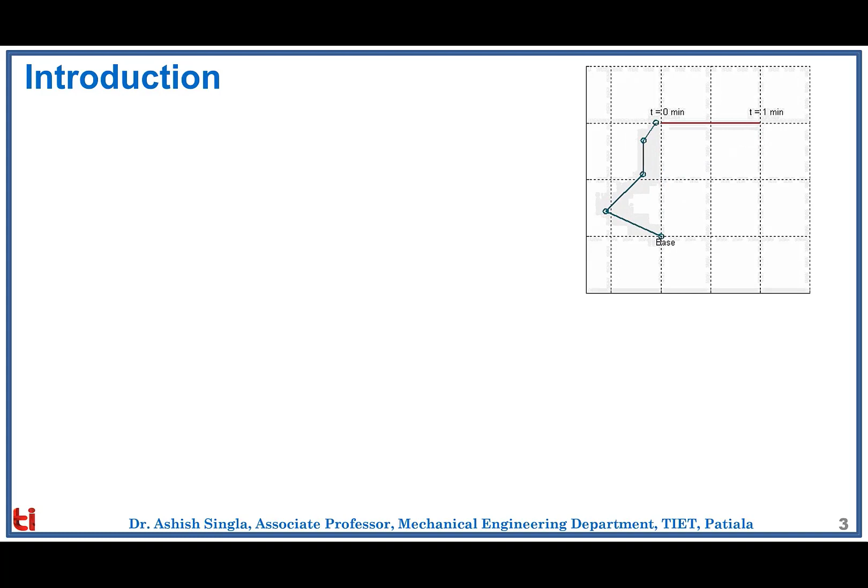We know that in any industry where the robot is deployed, it deals with a number of tools and parts. In the previous sessions we discussed that position and orientation of a body are very important, and a typical rotation matrix used to define the orientation of the body is given by a 3x3 matrix.

So if we see from the operator's perspective, it's very difficult for the operator to enter these 9 values. Do we have any other alternative?

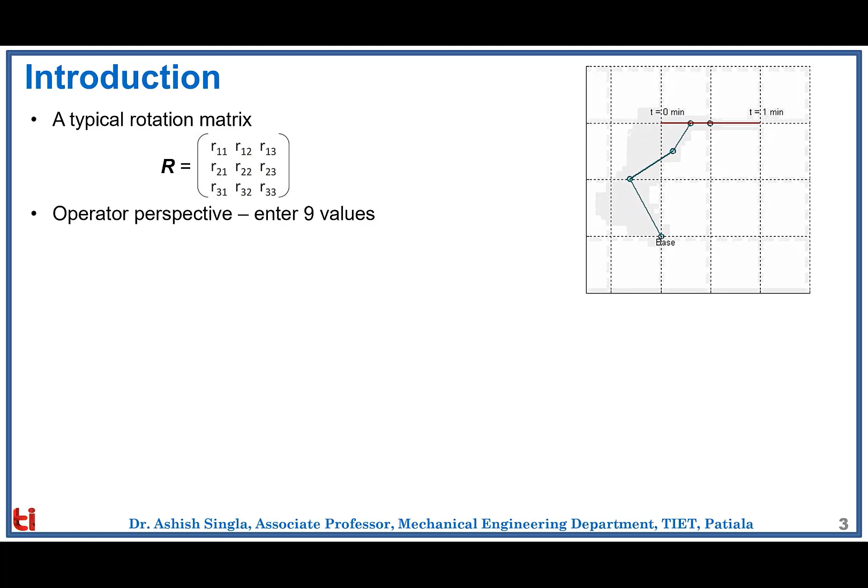As we know, the rotation matrix is orthogonal in nature, which means that out of the 9 entries, only 3 entries are independent, whereas the rest 6 entries can be calculated with the help of a set of constraints. Being orthogonal, it has 6 constraints, and only 3 independent values are there with which the rotation matrix can be defined.

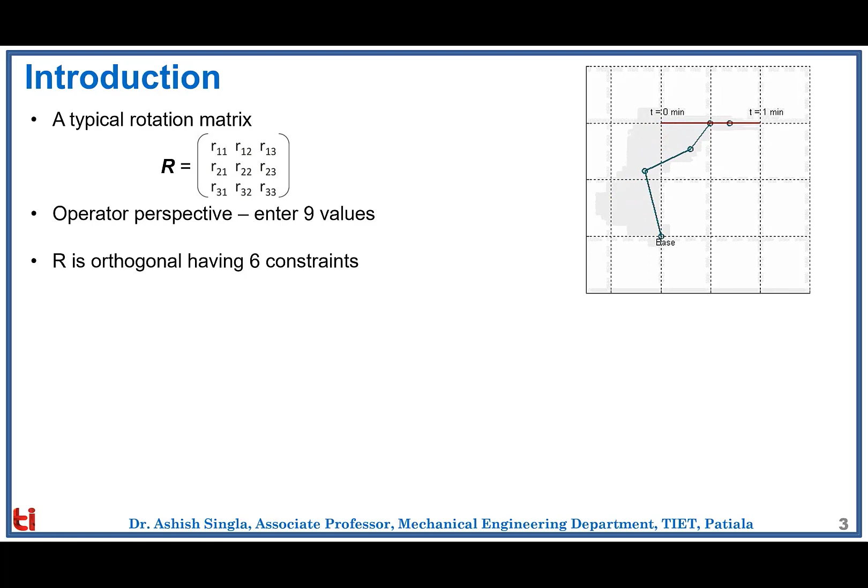So like in Euler angles, we have seen that any desired position and orientation of the body can be achieved by moving or transforming the body along the X, Y, Z axis by defining only 3 parameters or 3 angles.

Likewise, in the equivalent angle axis, it is also possible to achieve the same position or orientation of the body by using an alternate approach.

In this approach, we will identify one given vector k in 3D space, and if we orient the body along that vector and give a rotation theta about that vector, we can achieve the same position and orientation of the body as we have achieved using the concept of Euler angles.

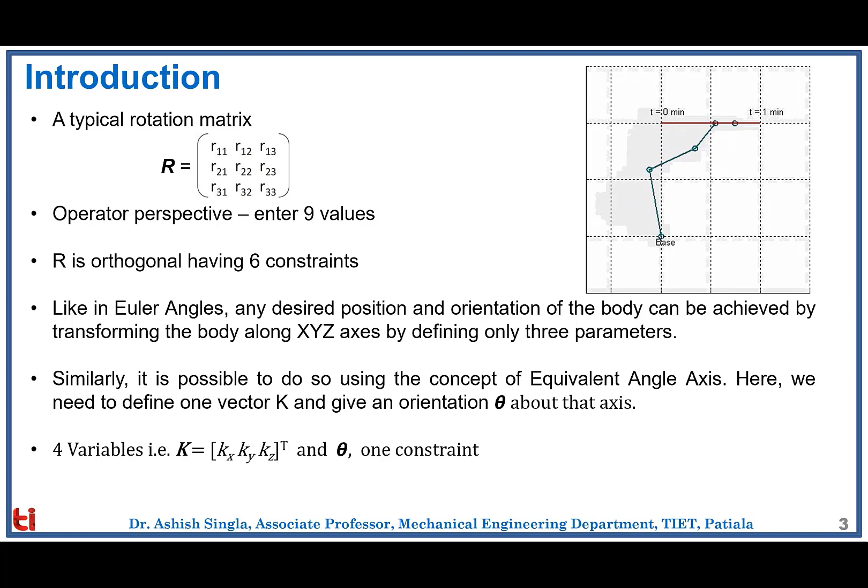So in this case, we have a given vector k, which is defined by 3 parameters kx, ky, kz, and the 4th parameter is theta, the amount of rotation given. Out of these 4 parameters, there is one constraint: that k is a unit vector. This kind of transformation can also be described with the help of 3 independent parameters.

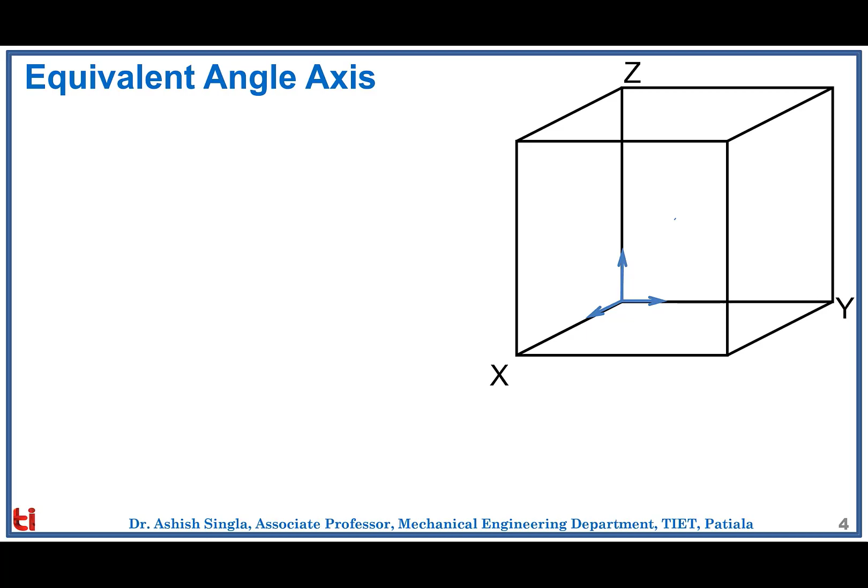So now comes the concept of equivalent angle axis. We assume that there is a cube. This blue one is the fixed frame attached to the body. This fixed frame has orthogonal axes x, y and z. Then we assume that there is one unit vector k which is attached along the body diagonal.

So this is the vector whose magnitude is unity. Its 3 projections on the 3 standard axes are given by kx, ky and kz. We need to orient the body about this k axis by a given angle theta. So in order to do that, we have to do some mathematics behind it.

First of all, we'll calculate the projection of this k on the xy plane. This you can see is the projection plane, and this green vector shows the projection in the xy plane. This green vector is called vector q, given by kx, ky and 0, because there is no z component.

And this q vector makes an angle alpha with respect to the x-axis in the xy plane. The magnitude of q is under root of kx square plus ky square, and it represents the orthogonal projection of vector k on the xy plane.

Similarly, the orthogonal projection of k on the xz axis is given by the pink plane, which makes an angle of beta with respect to the x-axis in the xz plane. This beta angle is the same as the actual angle between q and k.

So now we can define these angles in order to utilize them at a later stage. First, let's consider the triangle FBC. In this triangle FBC, we can clearly see that angle B is equal to 90 degrees. Then we can calculate cos of alpha and sin of alpha.

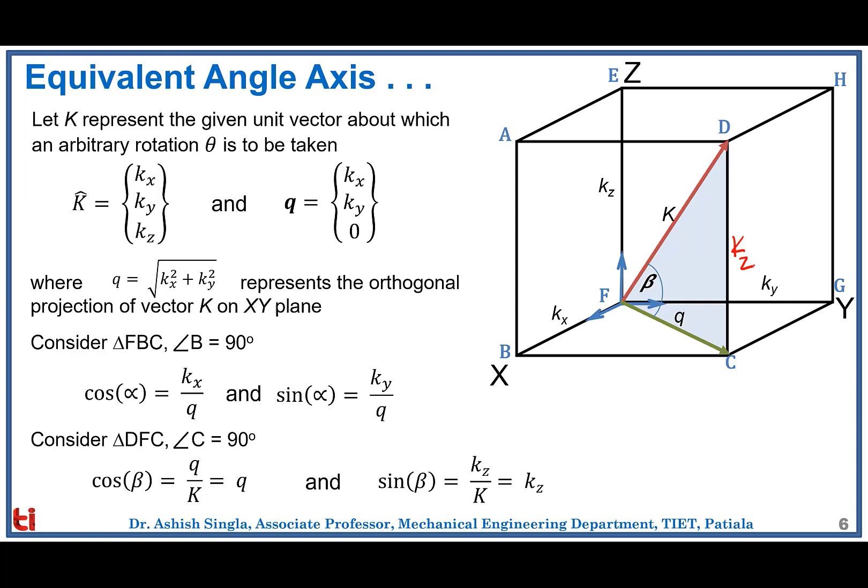This process will be done using 5 steps, which will be shown in the next slide. The first step is that we'll rotate K about the fixed Z axis by angle alpha. As the K rotates by alpha, its projection Q will merge with X, and the vector K will merge with the XZ plane, like this way.

So this is the effect of a rotation of a vector K about the fixed Z axis by angle alpha. If we see from the positive Z axis, this direction is clockwise. So all clockwise rotations are taken as negative, and all counterclockwise rotations are taken as positive.

Next step is, we rotate the new K about the Y axis by beta. Because all the rotations are taken in sequence about the fixed axis, all subsequent rotations we need to pre-multiply, as we have seen in the last session. After rotating the projected vector by beta in the counterclockwise direction, this results in projecting the vector onto the x-axis, like this. The net effect of our last two steps is that we are able to merge the vector K along the x-axis.

Now along the x-axis we will take the standard transformation of angle theta in the counterclockwise direction. So step 3 is, we rotate K about the x-axis by theta in the counterclockwise direction - that is the standard rotation performed. In the next two steps we do the transformations in reverse order so that the K vector can be restored back.

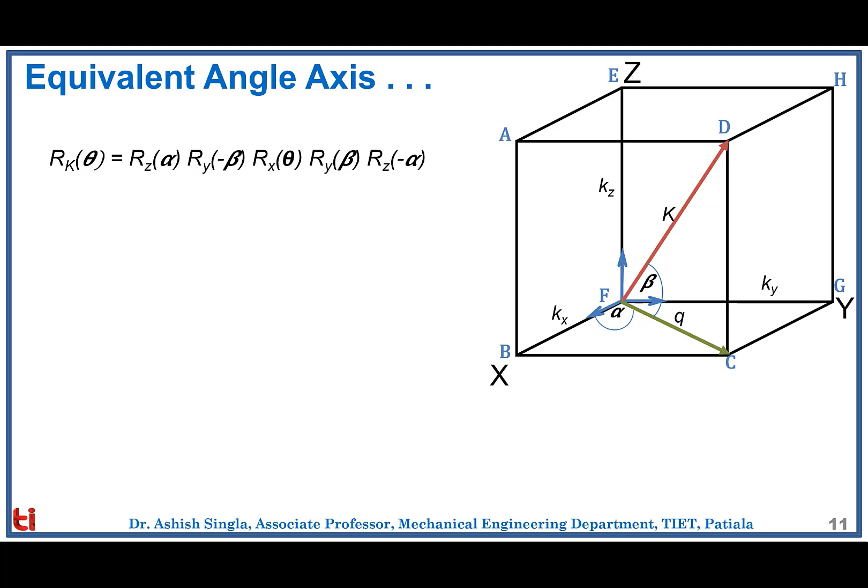So with this set of 5 steps, we have obtained the final rotation matrix, which is the combination of these 5 steps. After we write these 5 rotation matrices and multiply them, the net effect of multiplication of all these 5 matrices can be written like this, where C theta equals cos theta, S theta equals sin theta, and V theta equals 1 minus cos theta.

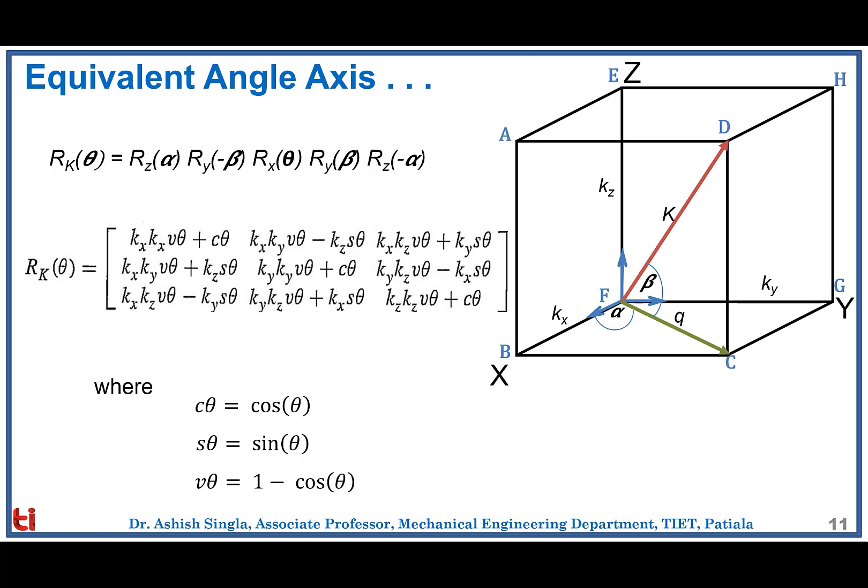So for practice, you can write all of these 5 standard rotation matrices. After you multiply these 5 rotation matrices in order, you should be able to find this final rotation matrix.

Now let's try to solve the inverse problem. In the inverse problem, let's say this transformation matrix is given to us. We should be able to find kx, ky, kz and theta back. In order to do that, first of all we'll calculate the trace. The trace of a matrix is basically the 3 diagonal entries, R11, R22 and R33.

So if we see, all 3 will become kx square v theta plus c theta, that is the first entry, plus ky square v theta plus c theta, plus kz square v theta plus c theta, which results in kx square plus ky square plus kz square v theta plus 3c theta.

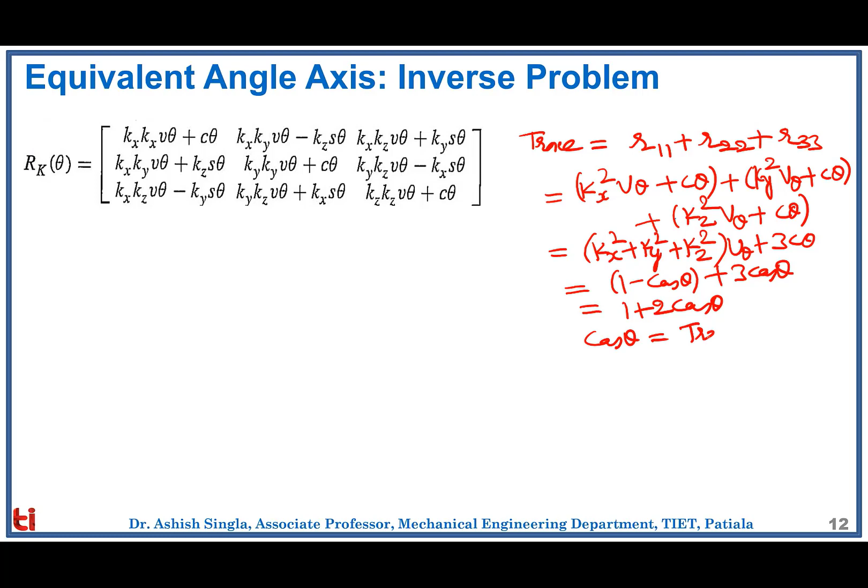We know kx square plus ky square plus kz square equals 1 because k is a unit vector. So this v theta equals 1 minus cos theta plus 3 cos theta, which results in basically 1 plus 2 cos theta. So we can say that cos theta equals trace minus 1 divided by 2.

So this is how we can calculate the cosine of the angle, which equals cos inverse of trace of this matrix R minus 1, divided by 2. Next, we can calculate each component.

To calculate kx, let's try to calculate R32 minus R23. By doing this, you can see R32 is ky kz v theta, so both will cancel out. So you have 2 kx sin theta. This results in kx equals 1 by 2 sin theta times R32 minus R23.

Similarly, we can calculate ky and kz using different terms which are summarized this way. So this is how we can calculate the vector k from the given rotation matrix. All three parameters - angle theta, kx, ky and kz - can be easily calculated. So this is called the inverse problem.

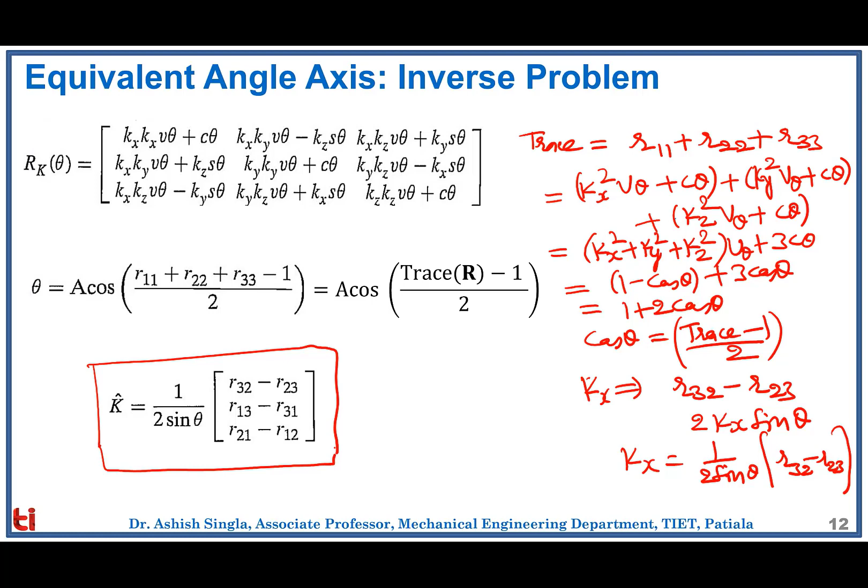Next, let's try to see if there is any pattern in the equivalent angle axis matrix. As we can see, this matrix has a very complex structure, obtained by multiplying 5 transformation matrices as discussed in the previous slides. So is there any way we can recall this matrix? Let's try to find out.

So all these 9 entries are given in this structure, from R11 to R33, which can be written in expanded form like this, where the first column and first row belong to the x-axis, the second row and second column belong to the y-axis, and the third row and third column belong to the z-axis.

First let's take the first row and first column. Along the first row and first column, let's write kx along the first column and also along the first row, followed by writing ky along the second column as well as the second row. Then let's write kz along the third column as well as along the third row. Then we need to append one term, that is v theta, with each entry.

So v theta, and that's the way we have v theta attached to all the entries. Next we need to add c theta along the diagonal. So c theta at r11, c theta at r22, and c theta at r33. Next comes the off diagonal terms, where let's take into account this r12 term.

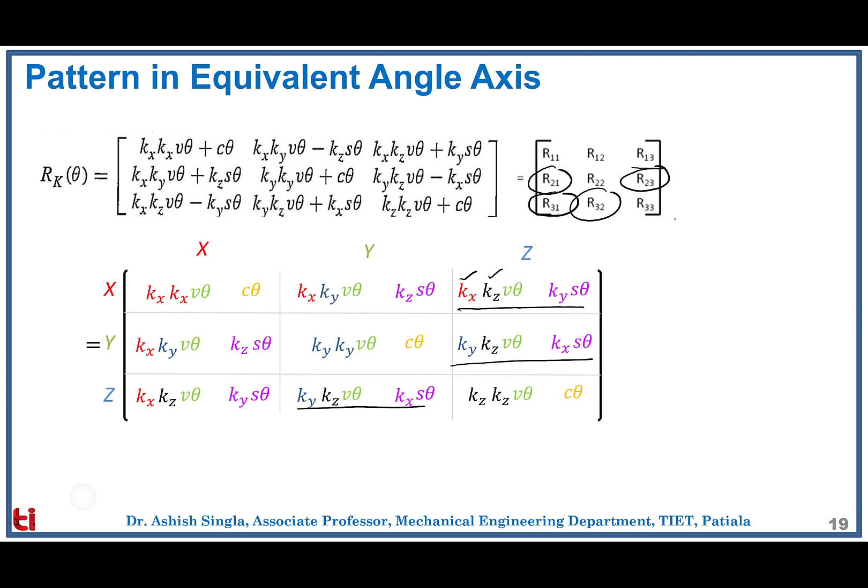So we need to follow the sign convention, where i and j represent the row and column index. We can write it as rij, where i represents the row index and j represents the column index. According to this sign convention, if the column index is more than the row index, that is if j is greater than i, the sign can be taken as -1 raised to power i plus j. By referring to j greater than i, we are basically addressing these three entries.

First let's take into account the diagonal entries, where the i and j index will remain the same. So over there all three signs are plus: r11, r22, r33. Then comes the three entries lying above the main diagonal, that is r12, r13, and r23.

First let's take into account the r12 entry, where i is equal to 1, j is equal to 2. So -1 raised to power 1 plus 2, that is -1 raised to power 3, becomes minus. So the sign is minus. Then comes the r13 entry over here, where the i index is 1, the j index is 3. So -1 raised to power 1 plus 3, which is equal to -1 raised to power 4, plus sign. So we have the plus sign over here.

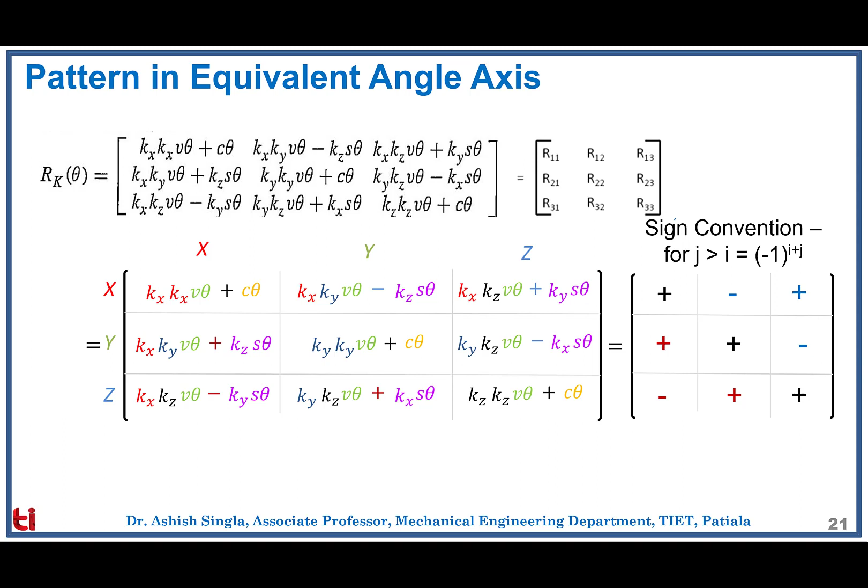Let's incorporate these signs in the main matrix. So we have plus for r11, r22 plus, plus at r33. Then we have the three entries above the main diagonal: minus, plus, minus. And finally we have the three entries below the main diagonal: plus, minus, plus. This is how we can write the whole matrix in a systematic manner without multiplying the five transformation matrices.

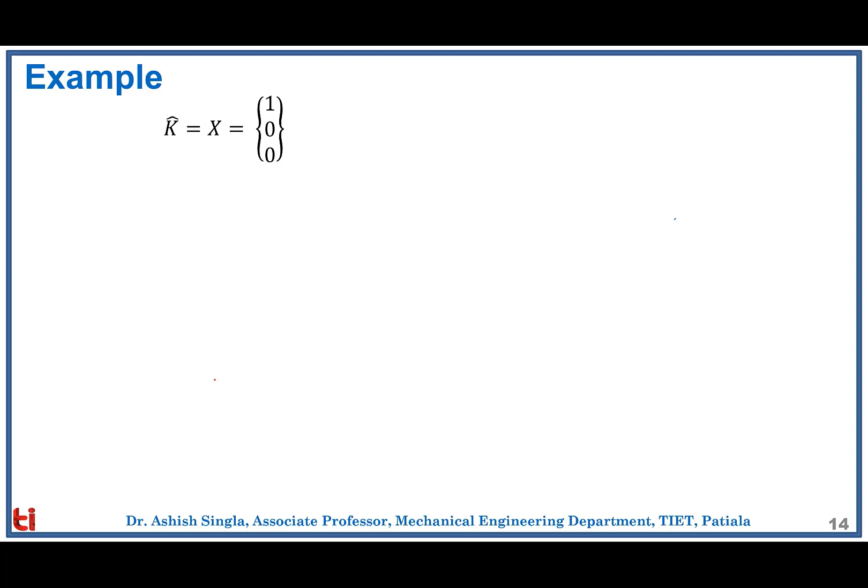In the end, let's have one example where let's assume that the vector k is not along the body diagonal but it's along the standard x-axis. So for the x-axis we can write kx, ky, kz as equal to 1, 0, 0. So we have this final matrix.

Here you can see all entries related to ky and kz are 0. So this entry goes to 0, this entry goes to 0, this entry goes to 0, this entry goes to 0, this entry goes to 0, this entry goes to 0. Then you have kz, this entry goes to 0, ky, this entry goes to 0. Then you have ky, this entry goes to 0, this entry goes to 0.

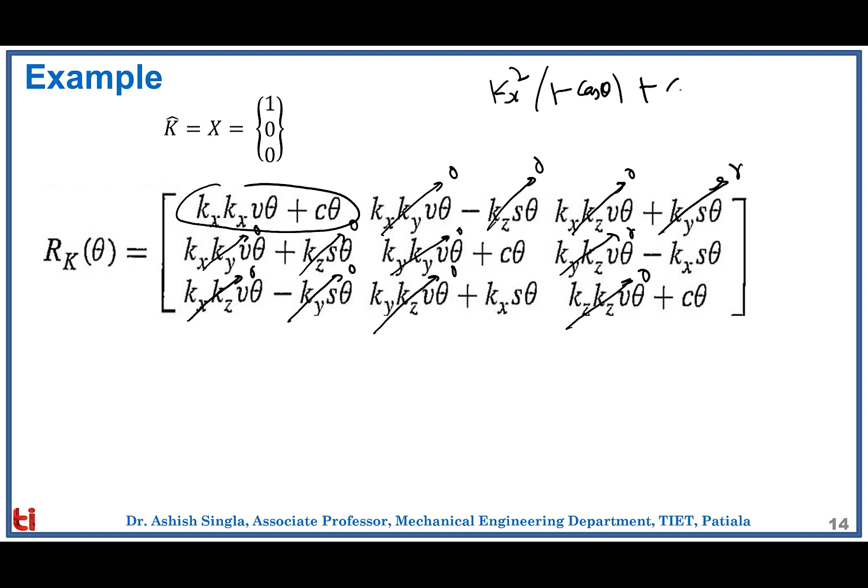So finally you can see the first term is kx square into 1 minus cos theta. If we talk about this entry, kx square into 1 minus cos theta plus cos theta, kx square being 1, so this is 1, so cos theta will cancel with cos theta, and the entry is equal to 1. Here 0, here both entries are 0, in the first column this entry is 0, this entry is also 0, so in the second row second column you have cos theta, second entry is minus sine of theta. R32 entry is kx sine theta, kx being 1, so you have sine theta, and finally R33 entry, you have only cos of theta.

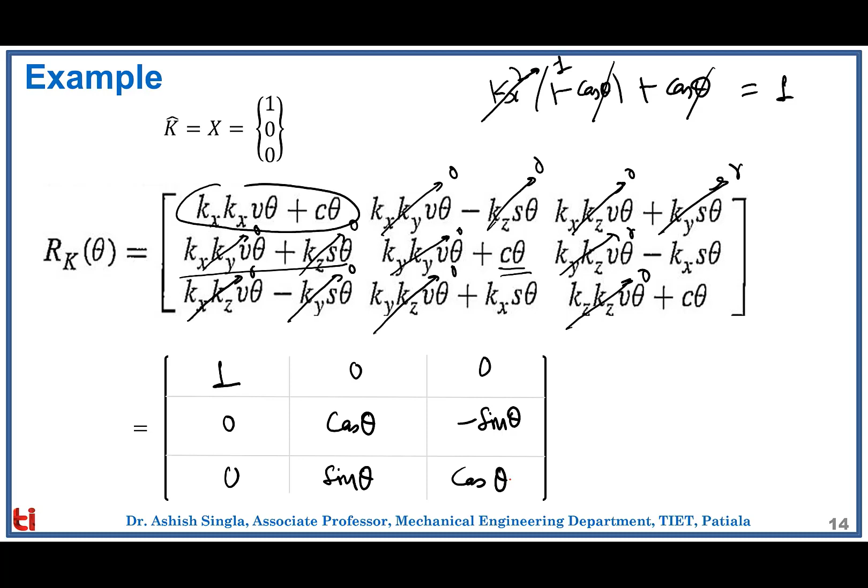This is a standard rotation template which we have discussed earlier for rotation about the x-axis. Here we can conclude that this matrix is again a general rotation matrix with which we can obtain the rotation about x, y, z axis or also any arbitrary axis. Then there are some practice problems which you can try. Thank you.